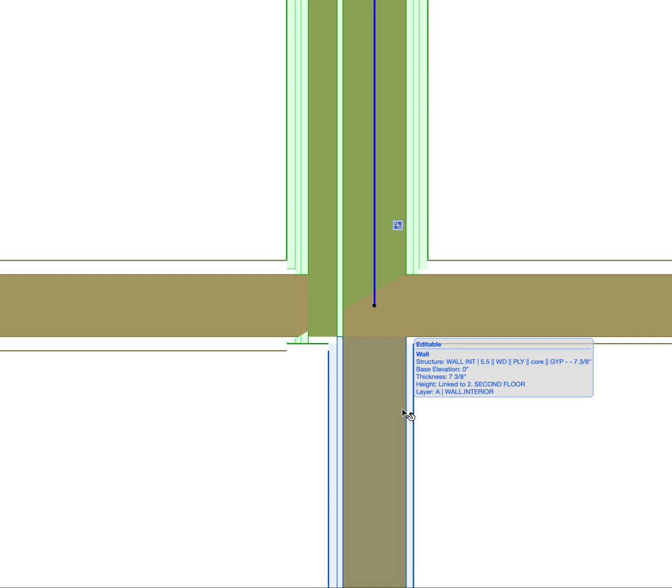Hello, I want to talk about a particular issue that we sometimes have struggles with, and that's trying to clean up these wall intersections where we have multiple walls coming into a single point and those walls not necessarily showing cleanly. So we can see here we have this double stud wall, a single stud wall with multiple finishes, another single stud wall with multiple finishes.

Again, some of these corners are cleaning up nicely. This wall has two finishes on each side. So this is why we have four separate walls instead of this one running through, because this wall and this wall, while in line, are distinctly different.

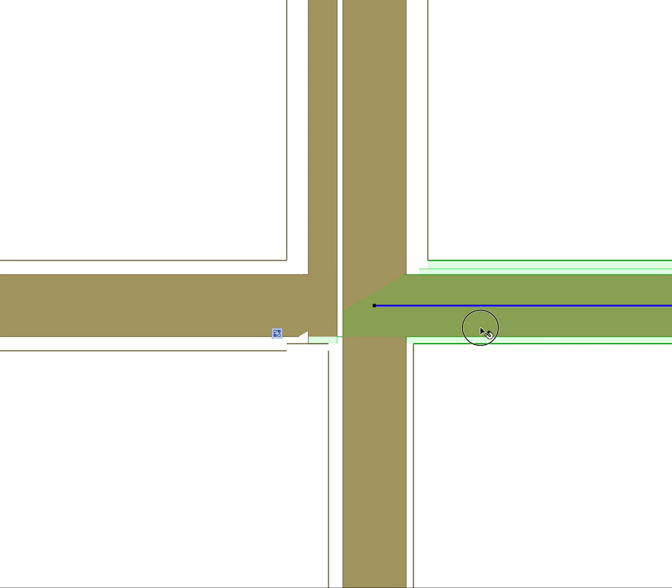Now it seems like these should clean up nicely because their reference lines are all coming together perfectly. But obviously this is not the preferred appearance for this. We should be seeing the core run through, and obviously the furring should be showing, stopping here with no air gap in this wall.

So the first thing I want to do is take some hot spots, because these walls could be repositioned and reference lines can be thrown off. So I'm just going to put some hot spots so that I get these alignments all properly back into place after we're done here.

So looking at this wall in particular, we want the reference line to actually be proud of this edge so that we can avoid things like this little bit, as well as the overall issue of this piece. So putting that reference line to the core, let's take a look here.

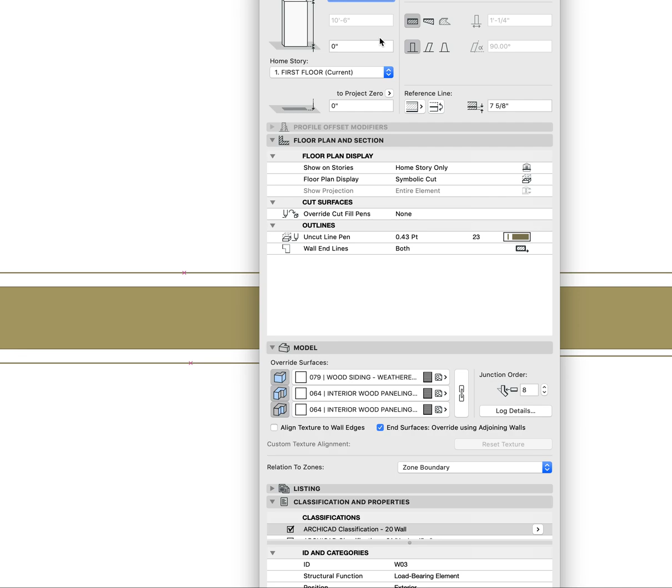We have reference line here at the inside face. Obviously that reference line is not on the inside face, which seems kind of problematic to begin with. And then beyond that, we have an issue of that reference line not able to set to the core. So we're at 7 5/8 inch from the inside face, and there's no reference to the core at all. So that seems problematic in and of itself.

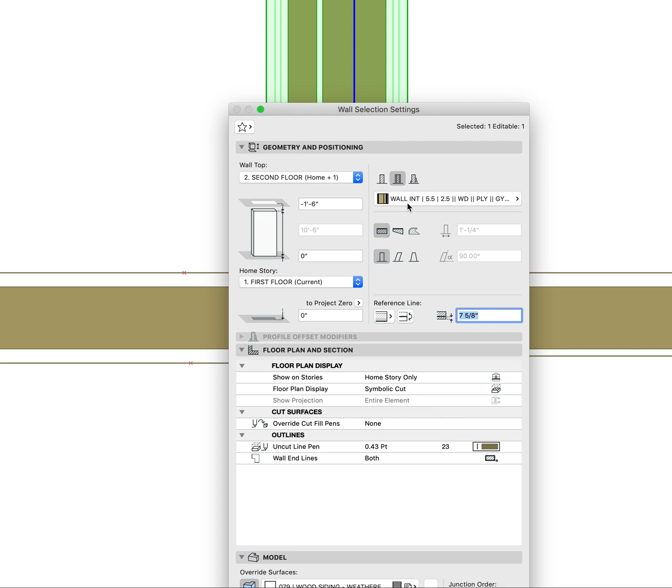So let's take a look at what's going on with this building material. If we right click here and say edit composite building material, we can see this piece right here is not defined as a core. If we look through the various layers of this composite, nothing is defined as a core. So the first thing to do is to say this piece is a core.

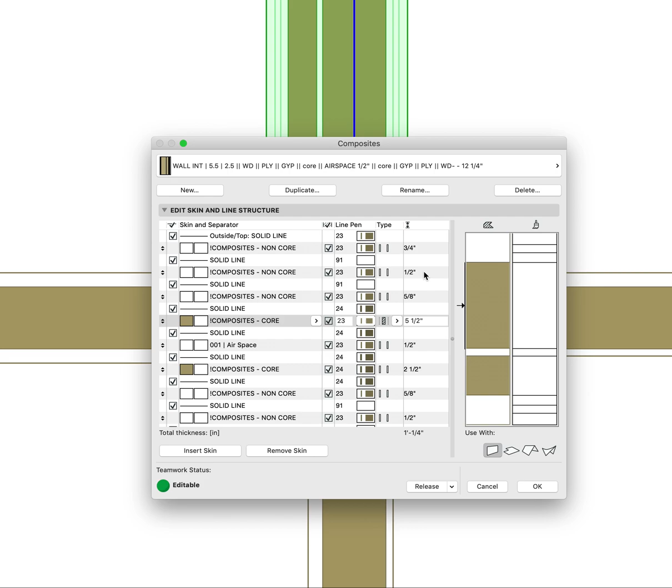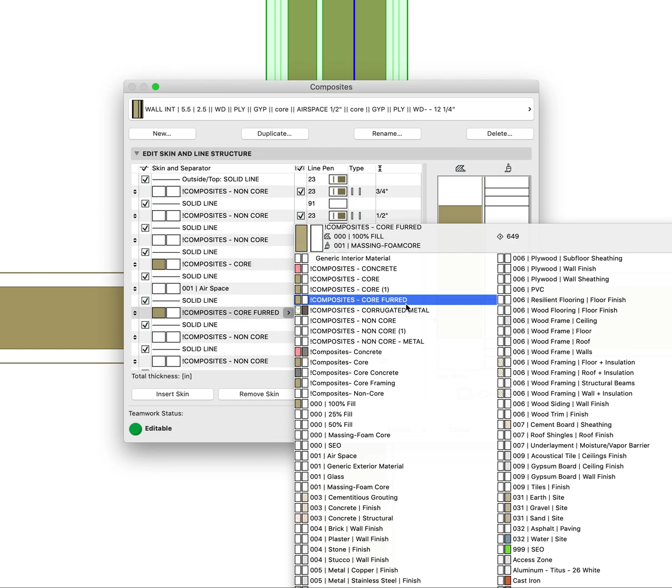The next thing is where this piece is running through, it should be cleaning up here better. But if we look at what this piece is, it's set to core, so it's matching the other building materials. We have, looks like, some redundant building materials that should be purged here, but we have core furred. And you look here, the core has a 700 building material priority, the core furred has a 649, so it's slightly less. We should be using something like that to designate this as non-core critical building material.

We can define this as a core, and then our airspace also shows up as a core. Again, that airspace, if we look at what that is, that's a 0 building material priority, so it shouldn't be running through no matter what. So now we've defined the core as both of these studs and the airspace that shows between them.

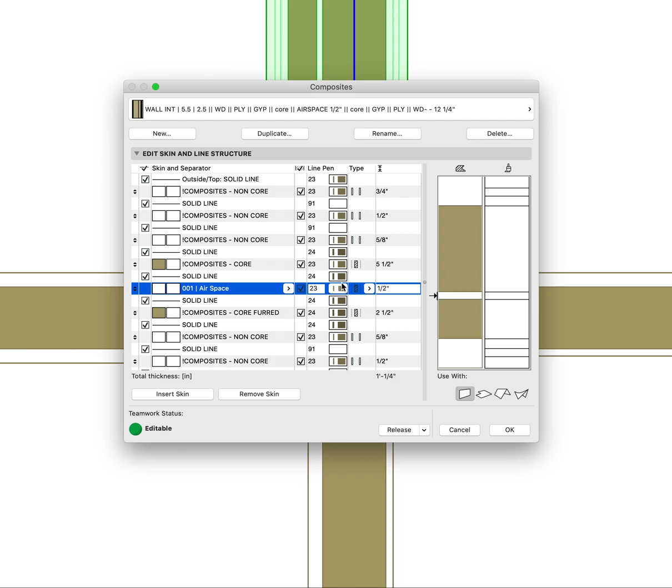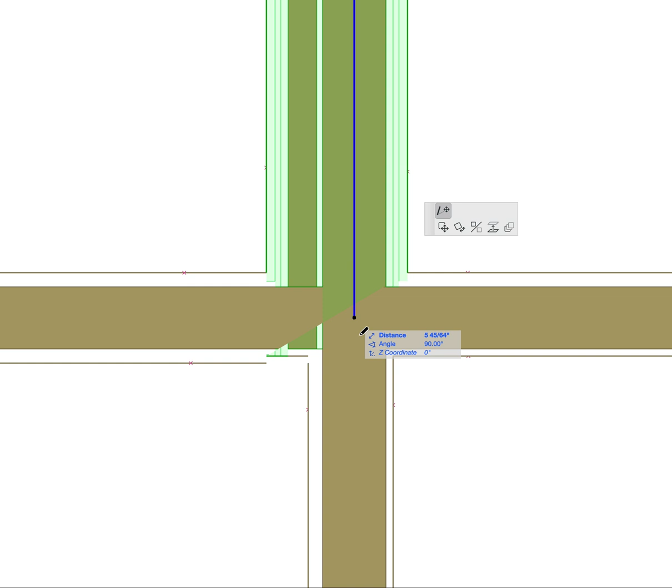Now that those pieces have a core, we can see this starts to clean up a little bit better, but there's still this weird angle coming through where they're all trying to heal together. So while the reference lines need to be touching each other, we don't want some reference line floating way out here. If they all come to the same point like this, they don't always clean up the way you would expect.

Now this thickness and this thickness are the same, so these should be cleaning up nicely, just like this thickness and this thickness are the same. So there's always kind of this give and take and experimenting with what these walls are and what they're doing.

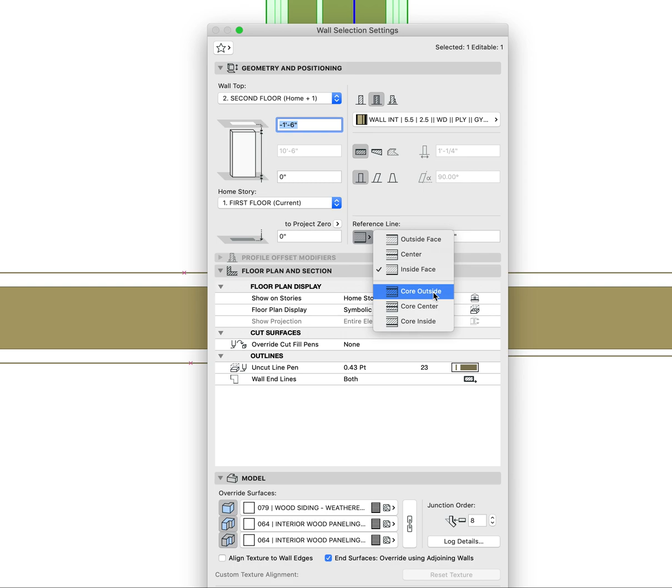So here in the wall settings, I'm just going to take a guess on which one is outside. We'll say core outside, and we'll set this to 0. And you can see that's exactly why I put these hotspots in here. So now I'll bring this back over. Now this starts to clean up a little bit nicer.

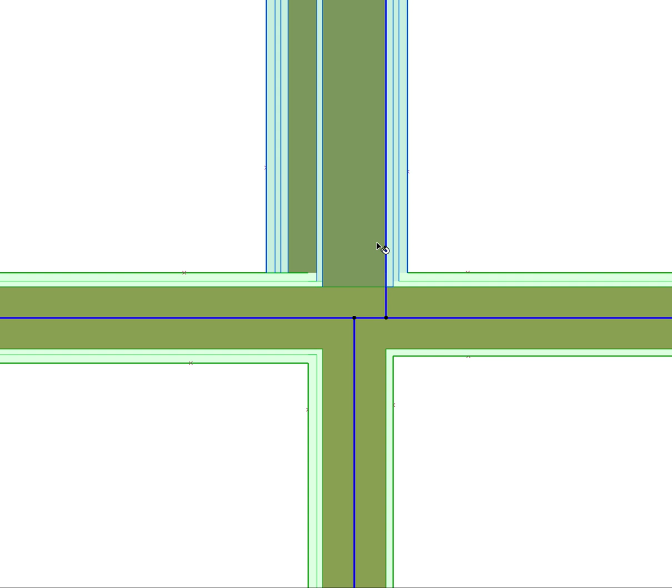These finishes are coming through where I wouldn't expect them to. I kind of want those finishes to clean up to each other. But let's take a look at where these walls are coming together now. So that seems a little bit more appropriate.

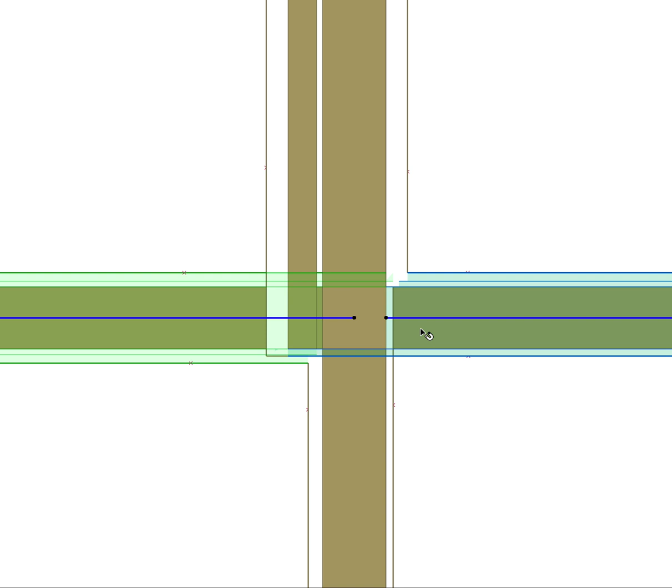We can kind of play around with how these join together a little bit. Maybe pulling this through, joining it that way. Obviously I'm making a mess of it there. So let's take a step back again. There's always a bit of experimentation, give and take, in terms of how these come together.

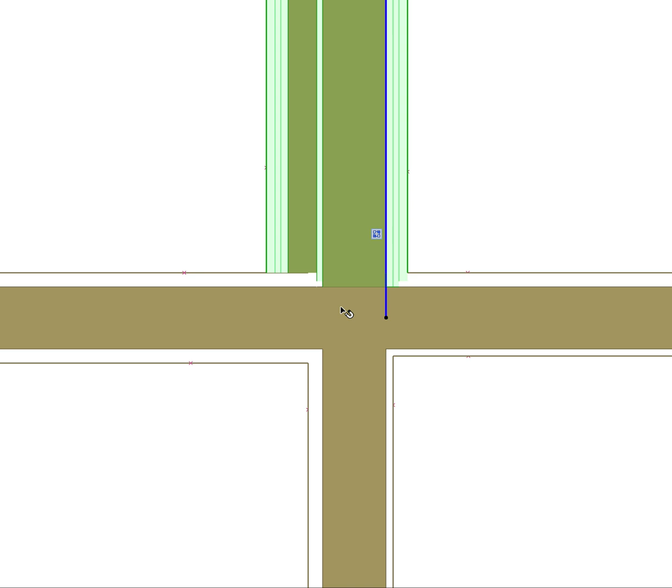So maybe rather than having this one join before this one, let's take a look at the junction order here. So that's 8. Maybe let's bump it up to 9 and see what that does for us. It doesn't look like that helps us at all. Drop this one down a little bit.

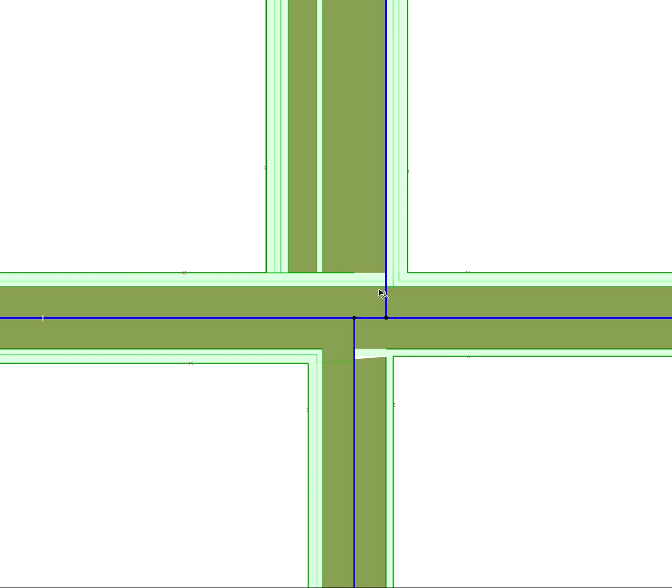So maybe it's a building material issue. Let's take a look at that. Let's join all of these back together at the same. Let's put them to 7. So we can see here that that's creating, again, some other additional issues where these building materials are running through and joining before this one.

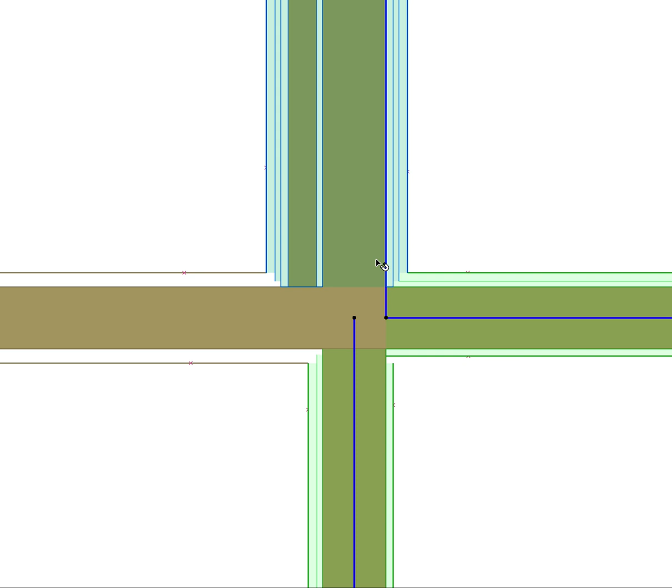So this one needs to join after the other two. And that's getting us very close to correct. It's just this issue right here. And that could be a matter of like shifting this reference line over as well.

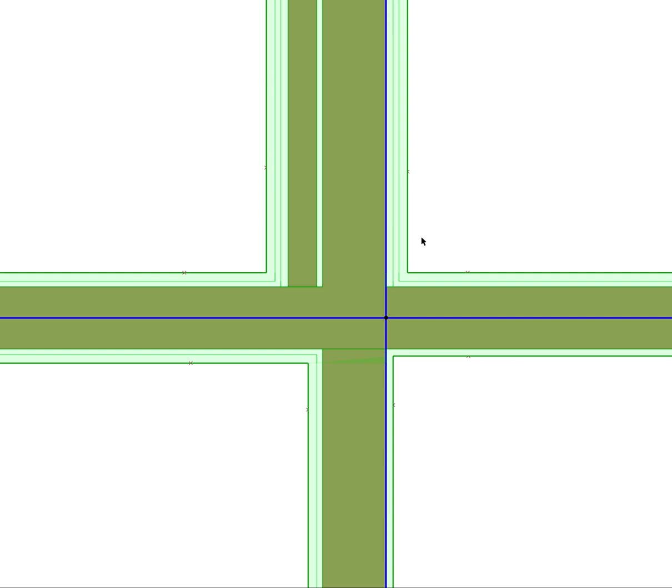So if we take a look at this wall, instead of saying core center, let's say core outside, core inside. And shift that back over to line up there. And then we get a nice clean junction. So just keep in mind that that reference line doesn't always need to be at the center of the core. Sometimes aligning it to the face of the core is going to give us that clean intersection where it needs to be.

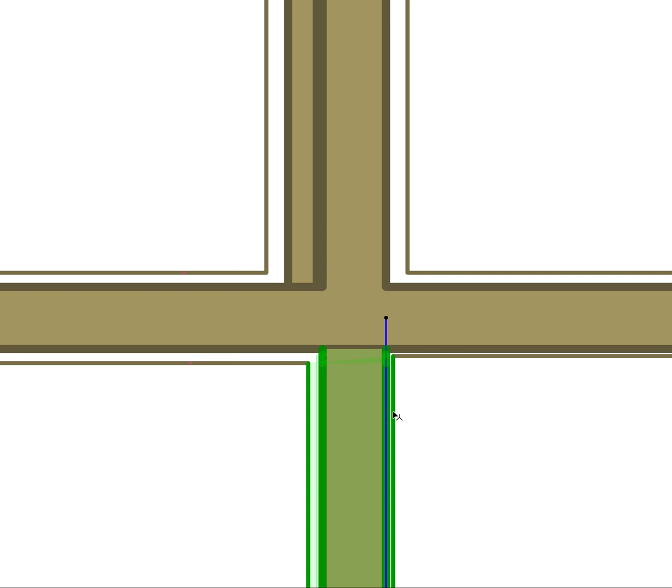Making sure that the building material intersections are set up properly. If we turn on our true line weight, it's okay to see this line running through because technically this furring is an extra piece. Obviously we want to see it as clean as possible with as few junctions in between these building materials as possible. But again, also knowing that these are correct designations, correct assignments, is really what's paramount to getting these to all tie together properly.